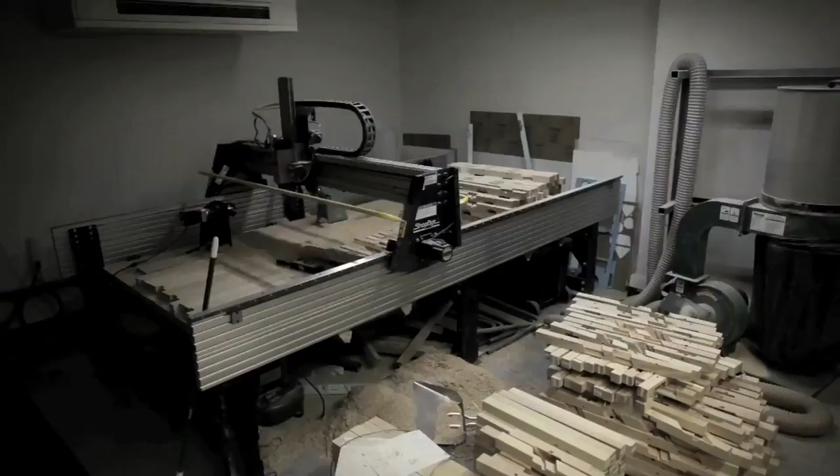Well, MIT is a very different kind of institute. Instead of becoming the recipients of building industry culture, we can now change building industry by the kinds of experiments we're doing in school.

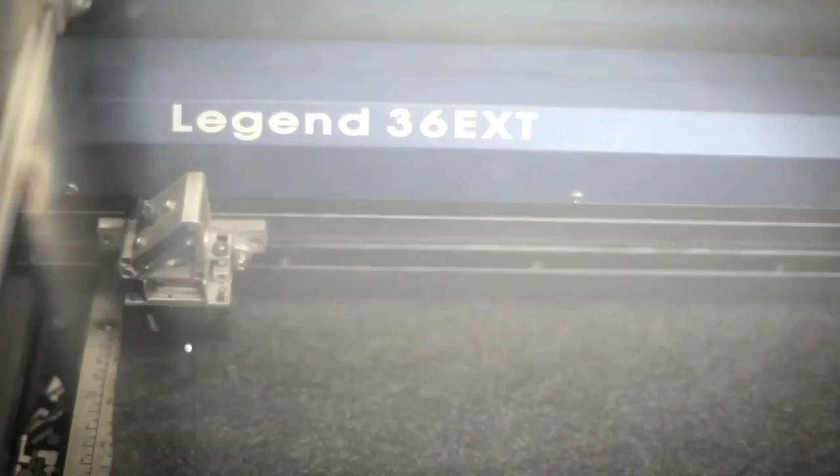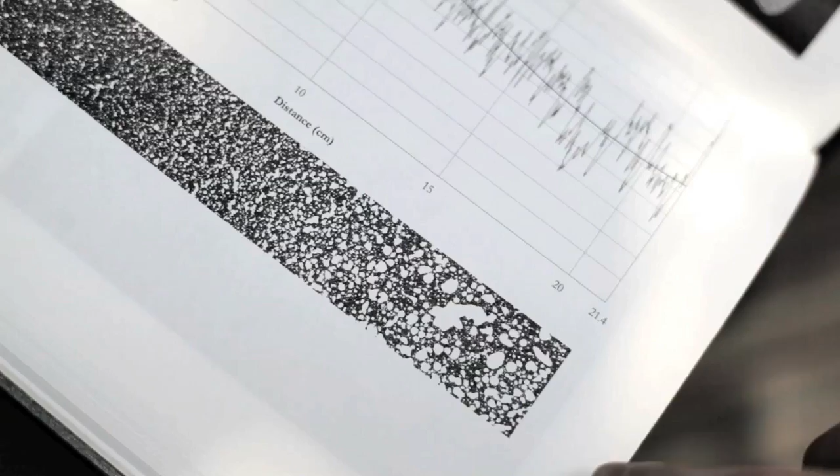MIT has a variety of departments that are so powerful that they have the potential of radicalizing what we do in design and in the architecture department. Even the way that we've structured our curriculum around workshops and other kinds of collaborations in a way fosters and encourages this kind of cross-disciplinary platform. So we're situated perfectly for the kinds of things that only MIT can do.

The invention of human artifacts of any kind always consists of three elements: the geometry, the process, and the material that constitute that artifact.

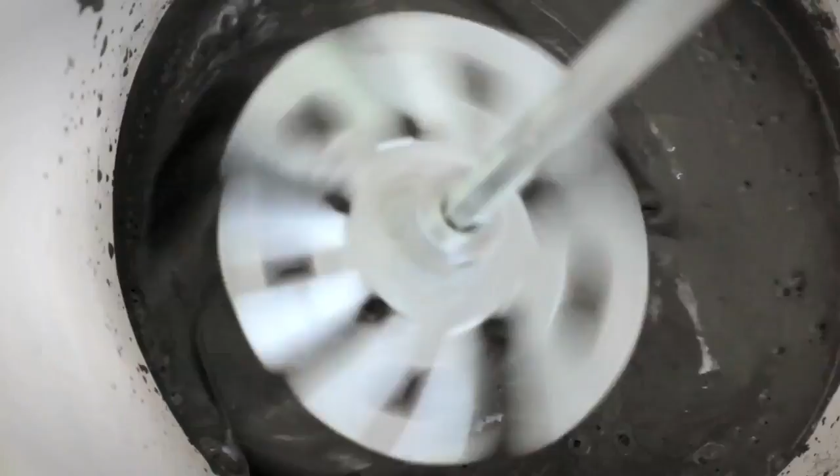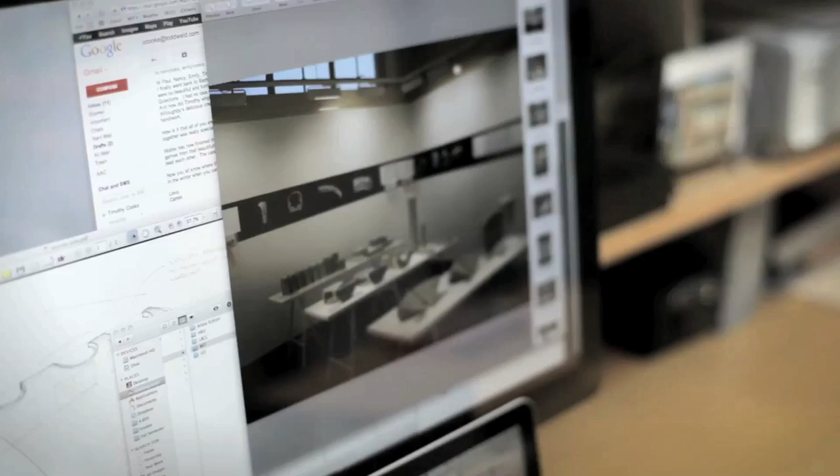It's very clear that new materials engender new forms, and architectural design benefits from addressing and applying new materials in an informed way. The Emergent Materials Group and the Urban Metabolism Group share a central interest in materials for the built environment. Lately, we've been working a great deal in the area of foamed materials, especially foamed cements and concretes.

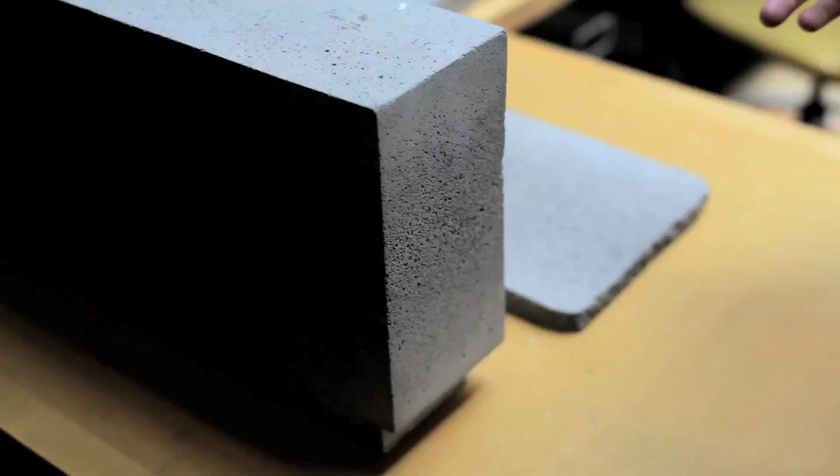Typically, a beam in bending is going to have the greatest amount of stresses on the top and bottom, so we can reduce the amount of material on the interior of a beam.

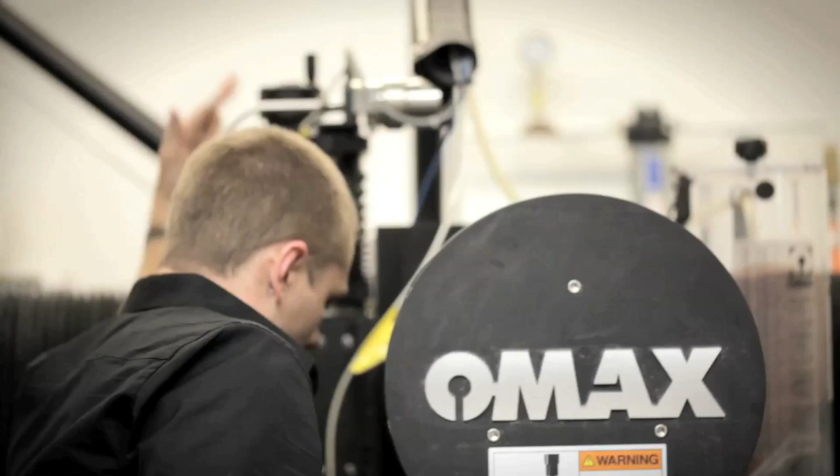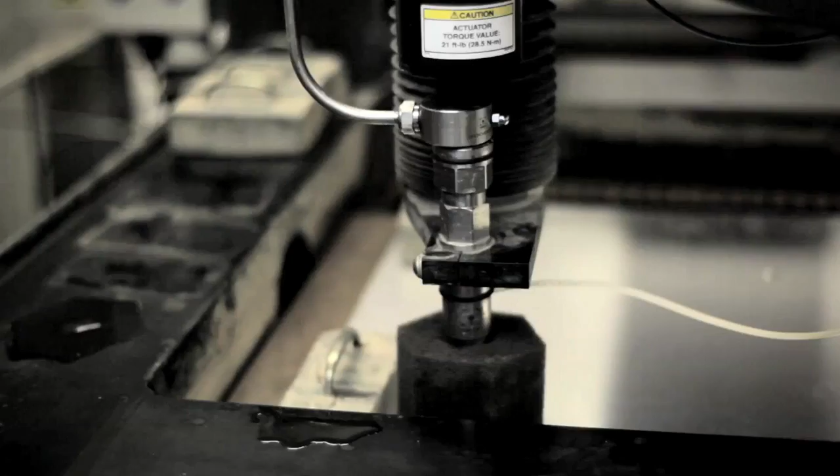The work really tries to address that there's two main paradigms throughout almost every industry. The one paradigm is what can you design, what can you compute or analyze, and the other paradigm is what can you physically construct or what can you build.

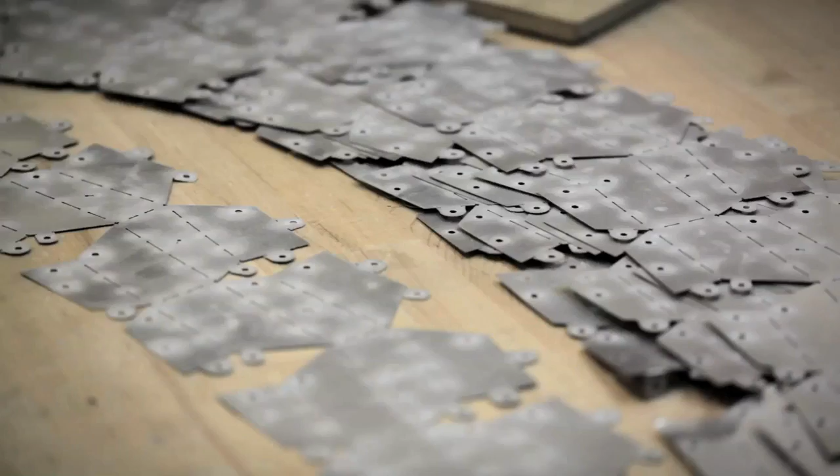The work really tries to traverse all scale lengths. It tries to work from the nanoscale, which is traditionally where we see self-assembly in biological and chemical examples, and it tries to bridge that and say, can't we use this phenomenon of self-assembly as a new paradigm for building things at large scale?

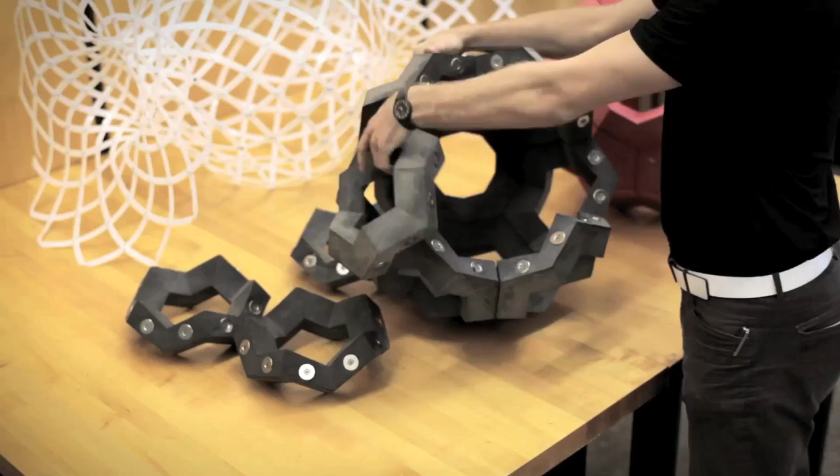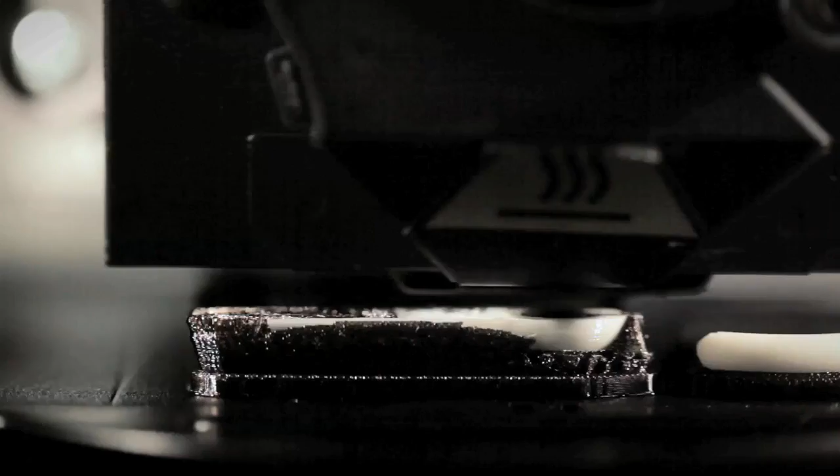We work with any type of material, synthetic or natural, and really try to design specific geometries that have materials in mind. When you design those two together, they can respond to energy. The energy sources can be heat, shaking, gravity, pneumatics, electronics—so you can use any type of energy. When you mix that with the geometry and material properties, then they can respond and change state.

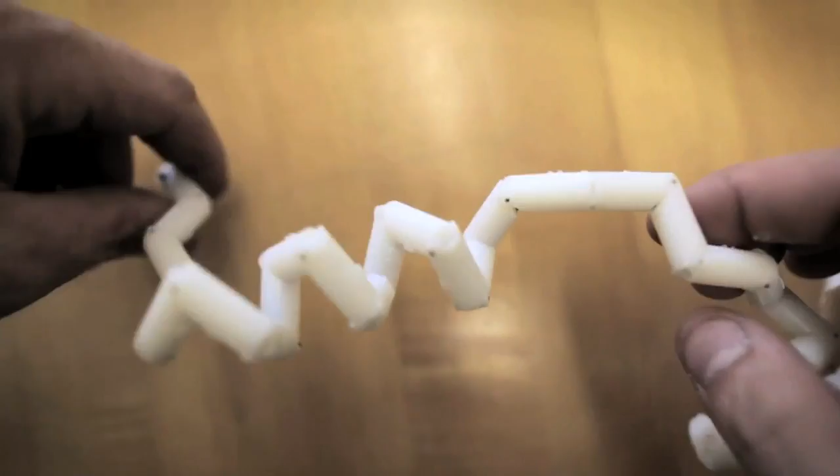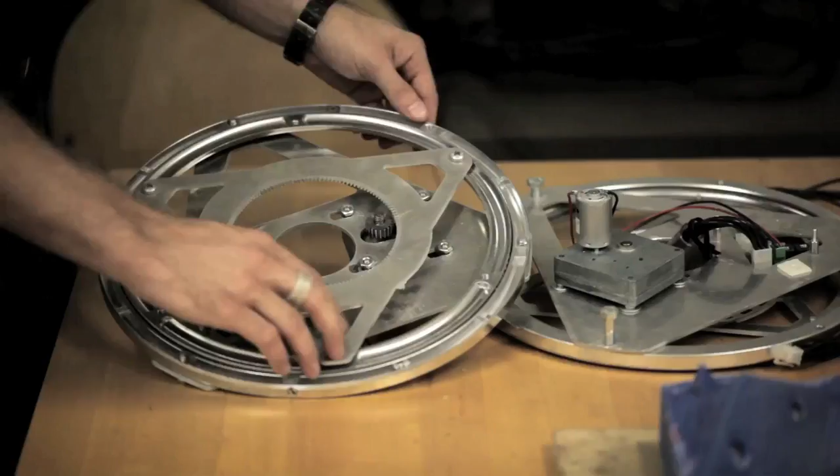Primarily, it will first be applied in extreme environments, scenarios where it's difficult to build. The research and the practice is really about cross-disciplinary collaborations between designers, scientists, and engineers working on this phenomenon of self-assembly, discovering where we find it naturally, where we can use it synthetically, and trying to apply that at all different scale lengths.

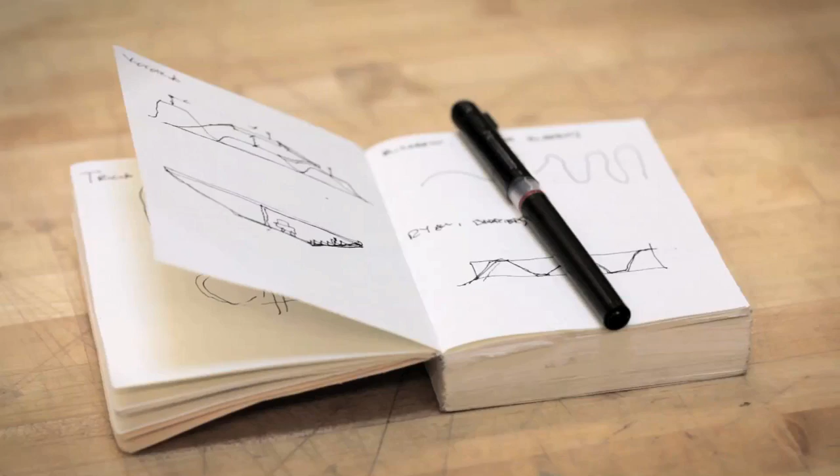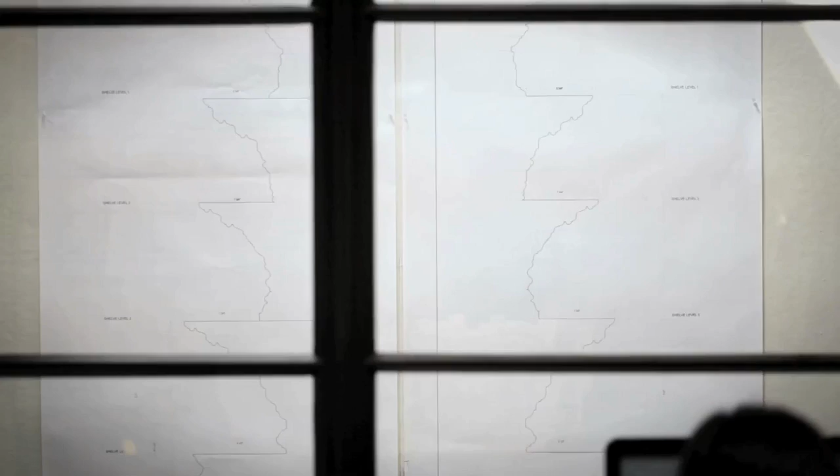The focus of our work, at least at this smaller scale, at the scale of say art installations or retail, we leverage CNC fabrication methods, but not as a way to exude their prowess necessarily, but more as a way to help us get at a particular formal agenda.

An installation called Totems, which in a way is a kind of proto-architecture—not quite architectural, not quite sculptural—I think offers a kind of proposition to each of those disciplines.

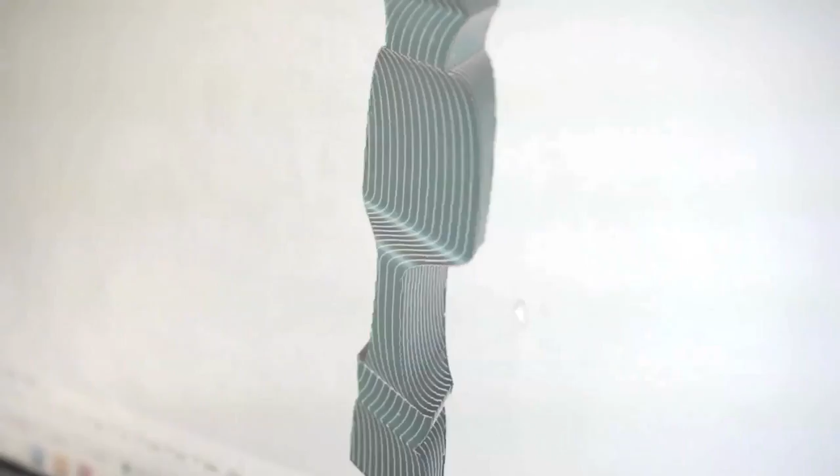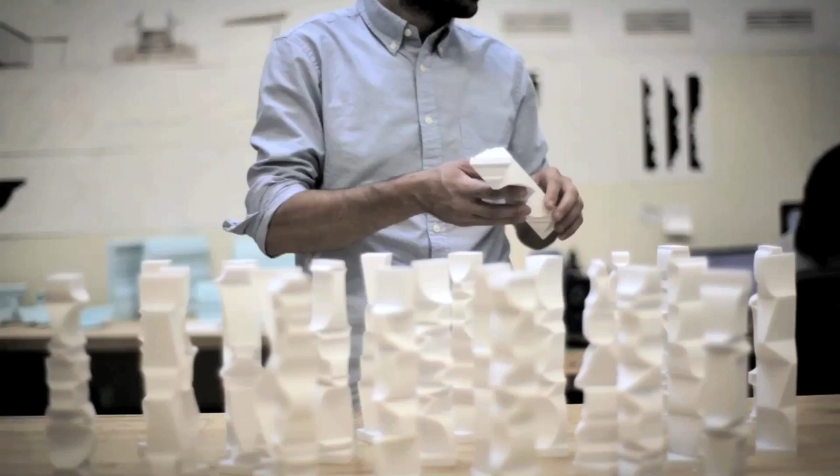We do a lot of testing via 3D prints. A lot of the formal investigations for Totems specifically happened in 3D prints. We did maybe 30 to 50 3D prints of the totems as a way to understand how the light and shadows were working and how best the anamorphic effects were working before we went to the large format wire cutter.

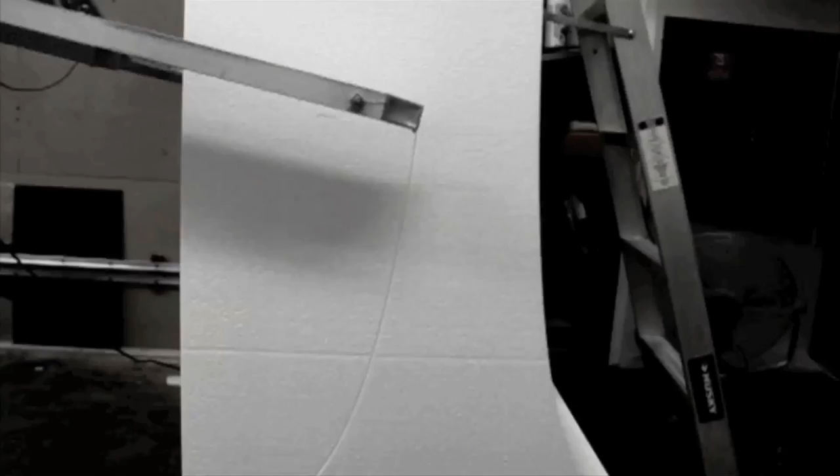In terms of collaborations, some of those happen here at MIT. Joel Lamere and I are developing an installation now, which is an anechoic chamber, and the anechoic chamber uses industrial felt both on its exterior and as a way to absorb sound on the interior.

I'm bringing a kind of disciplinary, formal, or geometric interest on the one hand, and also a certain set of specialized understandings of the behavior of these sheet materials on the other.

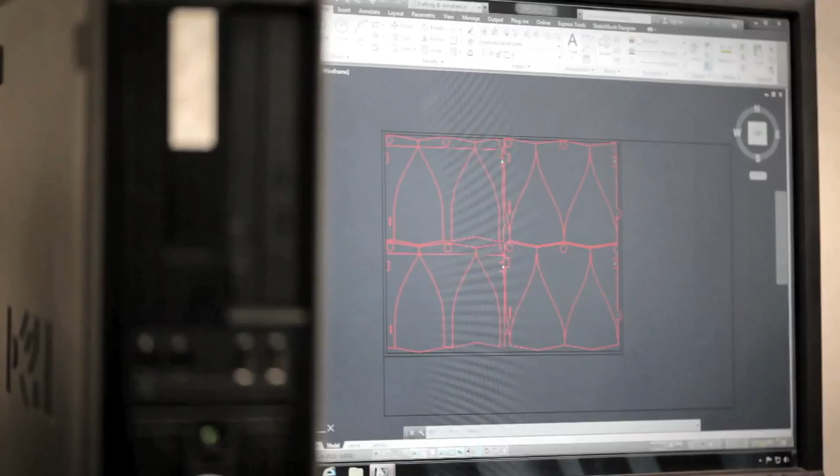So my architectural interests are really broad, but in terms of my current research preoccupation, it's about material geometry—specifically sheet shapes or sheet material geometries, how they bend, stretch, stack, fold.

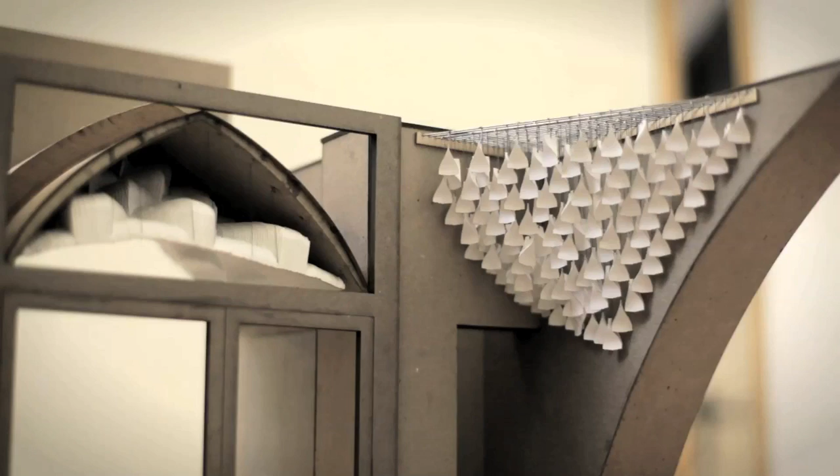But obviously understanding sheet materials is really critical to architecture. It's a long-standing discourse on sheet materials in architecture, in part because it's so ubiquitous in conventional construction. So everything including plywood, sheet metal, steel, aluminum, and plastics all have to deal with developable surface geometries, which is to say sheet shapes generally. And so expanding the total set of understandings about sheet shapes is a totally and kind of obviously worthwhile architectural undertaking.

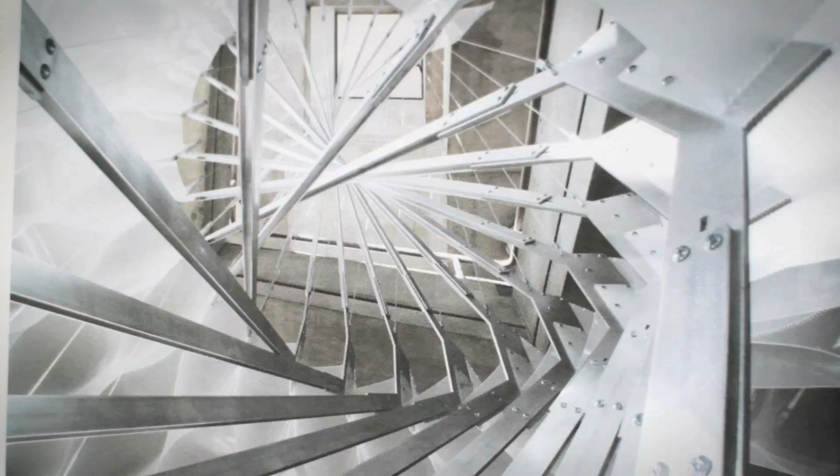These installations attempt to jump from the scale of the paper model to, you know, the scale of the architectural space at the very least.

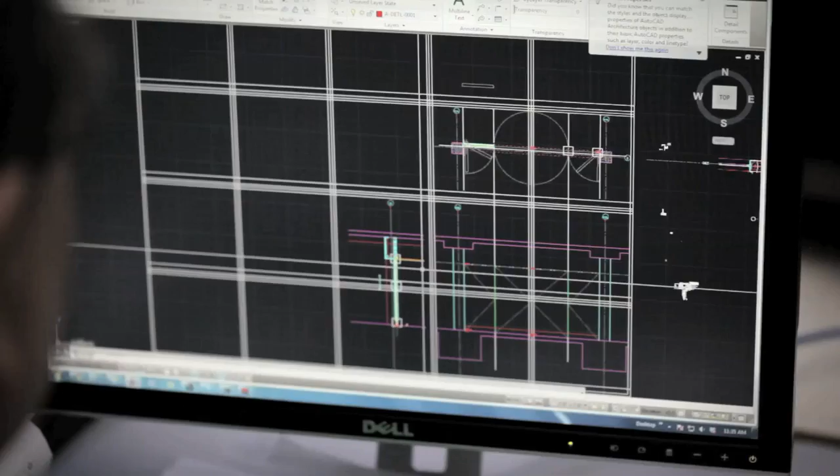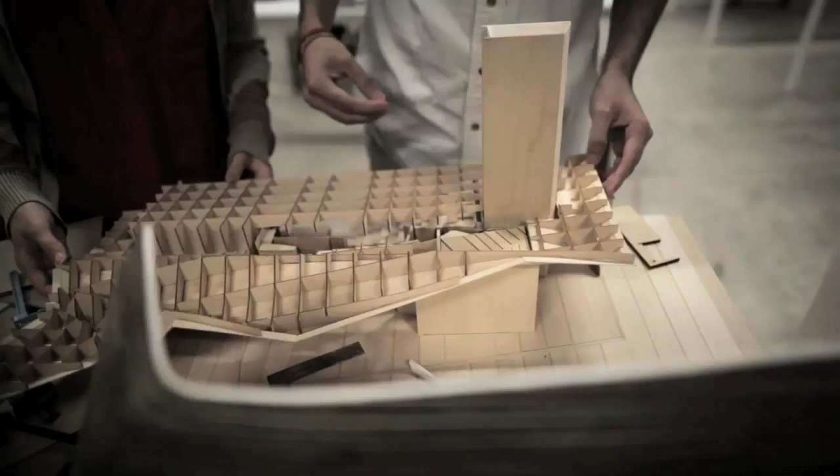Well, over the past 20 years, first as Office dA, now as NADAAA, we've identified two or three areas of focus. The first has been to look at materials and their behavior as a point of departure for many of the architectural experiments we do. The second area is to recognize that materials don't have an endless limit. Everything comes in modules, in sheets, in blocks, in bricks, and without aggregation, there's no way of figuring out how construction works in general.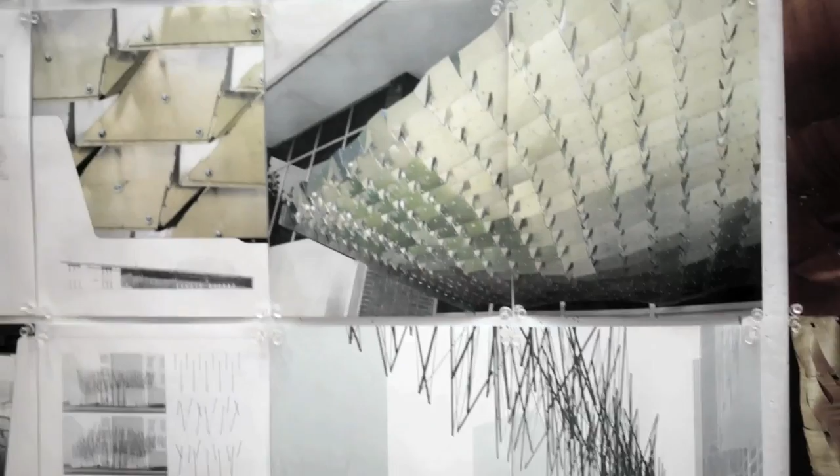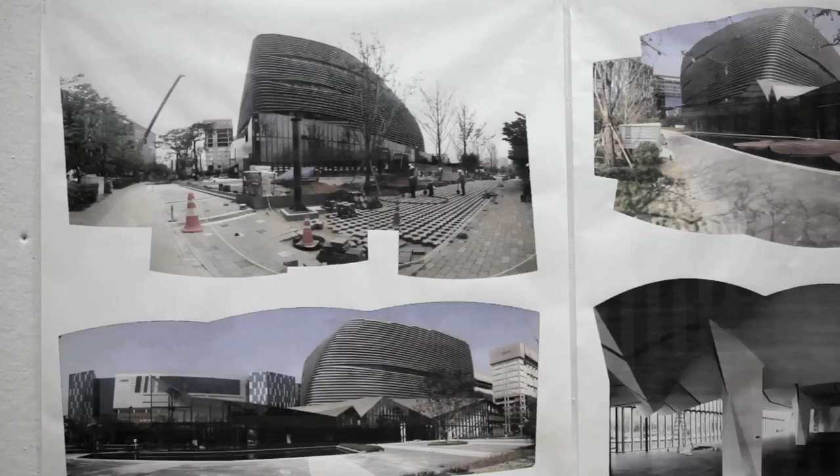So the detail of bringing things together as a point of departure has been another central focus. This has been a point of revolution for a range of projects that we've researched and undertaken, some at the scale of a piece of furniture, others at the scale of a building, and others really at the scale of urbanism.

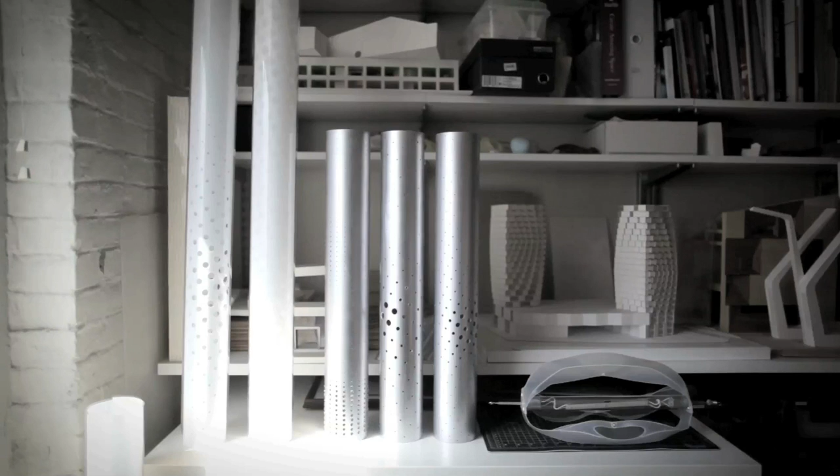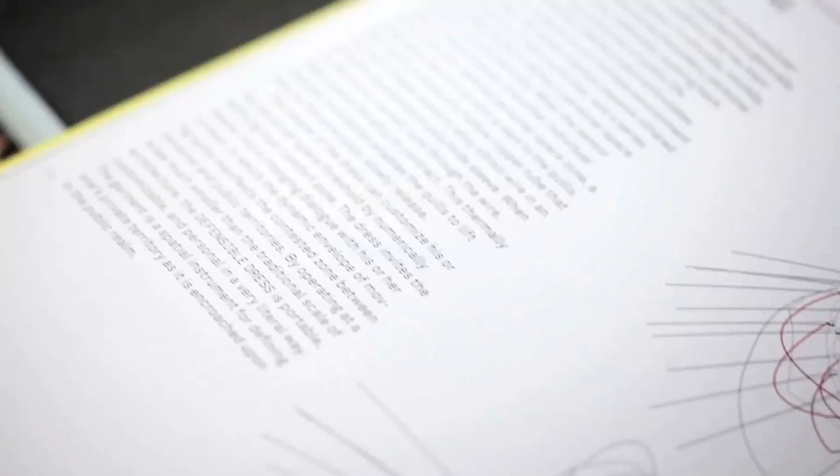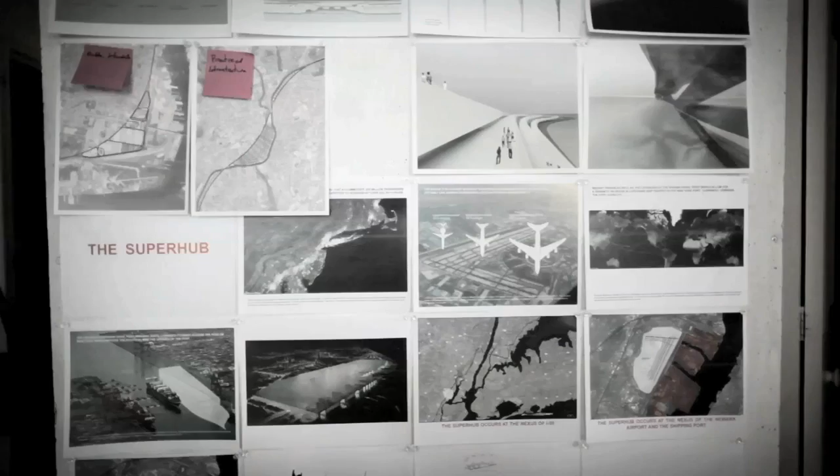One of the agendas of the studio is to create interactive architectures for public space through design and technology. These projects can range in scale from the scale of the body, such as the Defensible Dress Project, a wearable architecture which uses a microcontroller and shape memory alloys to defend your personal space, to very public scale infrastructural projects, such as our proposal for the Audi Urban Futures Initiative, where we're speculating on high-speed regional infrastructure and transformations in the city around issues of mobility for the year 2030.

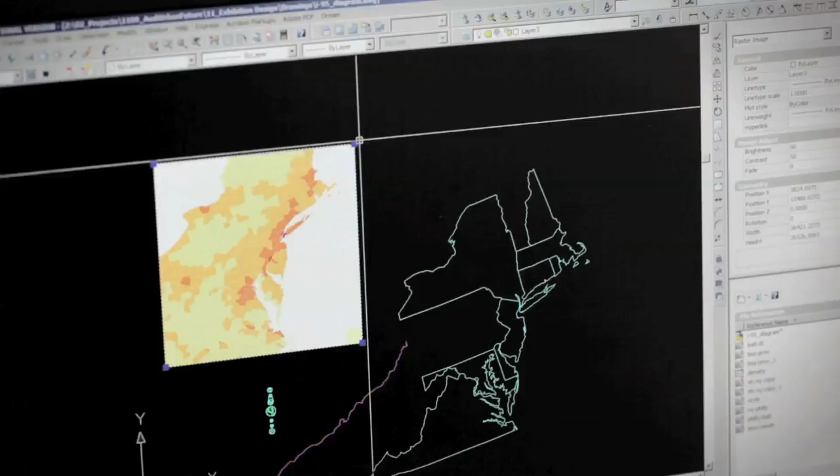It seems now more and more necessary that our environments have to become smarter, more responsive, and more flexible. The way in which architecture is made needs to be completely rethought if we're to go beyond bricks and mortar to engage the challenges of the next century.

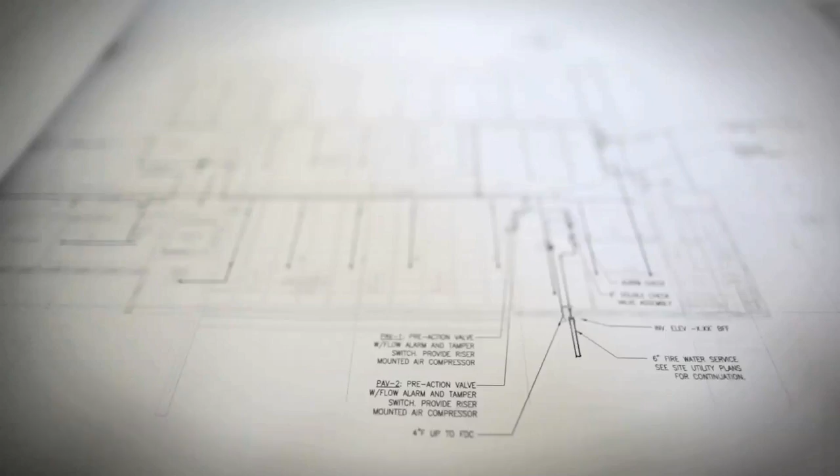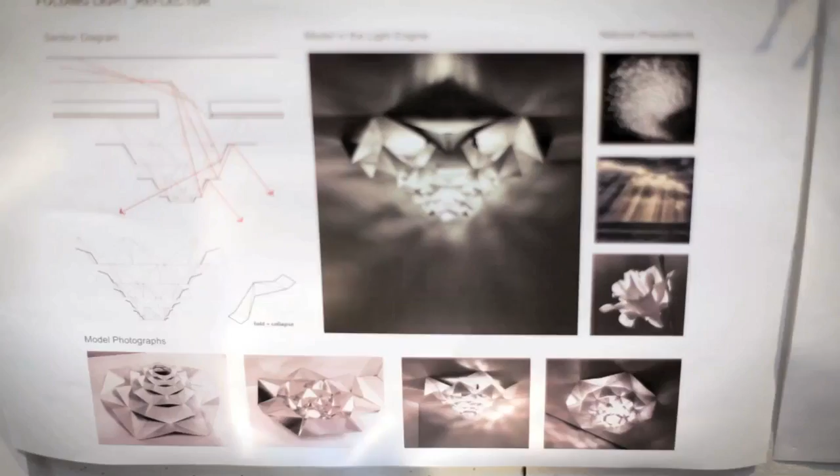My work as an architect focuses on designing architecture and urban scale interventions that engage the emergent infrastructure of our time. We're interested in how design engages that mutability between energy and matter, when materials generate energy or store it, when materials are dynamic and change state, exchange heat, produce light, or communicate information. The challenge, I think, for the discipline of architecture today...

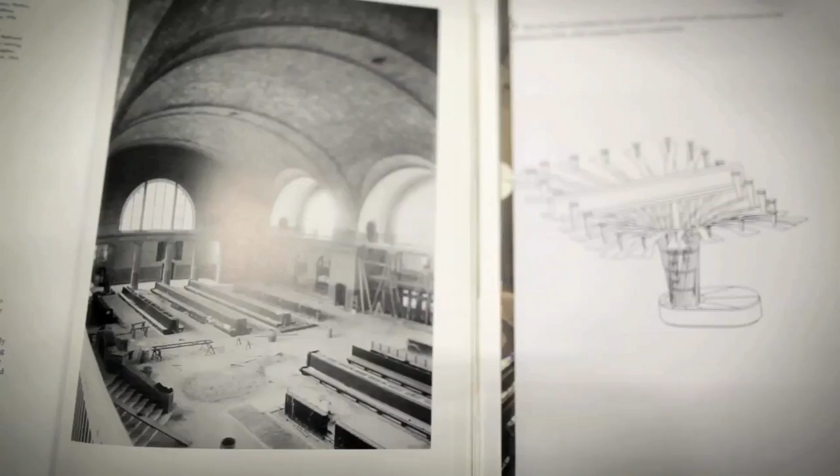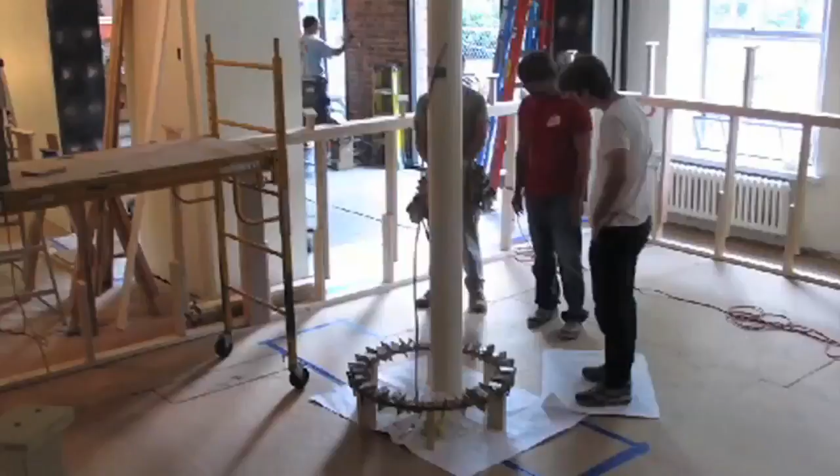isn't in digital fabrication, it's in material fabrication, in thinking about what it means to be material today when we move fluidly between digital and physical realms, how we use materials and not waste them, and how we form materials and how we transport them.

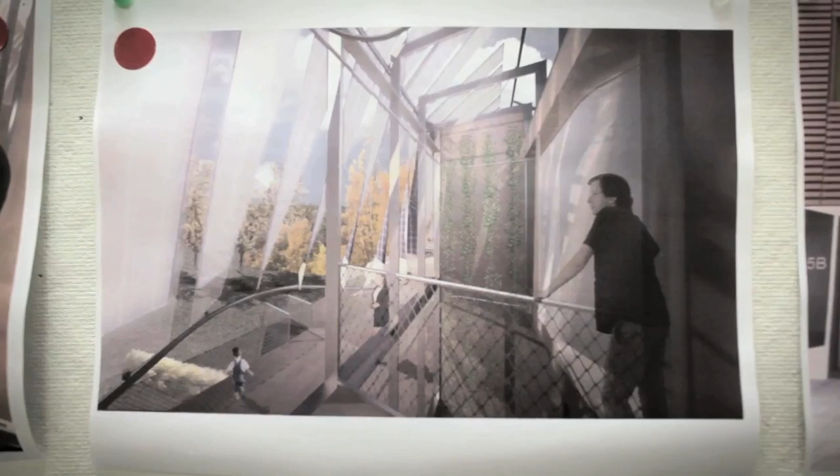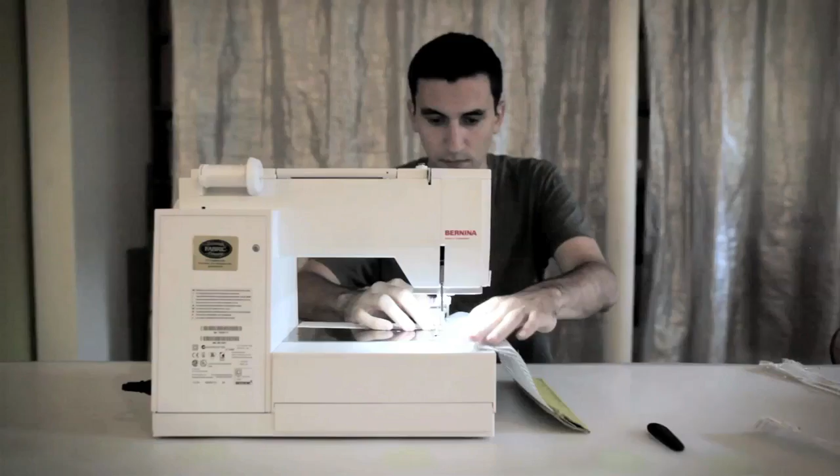If we're going to change the building industry and regenerate an innovation-based manufacturing segment in the United States, then I think we need to do this from within practice, from working with the norms of the building industry, but not settling for those norms, instead innovating to both accept and transform those standard conditions.

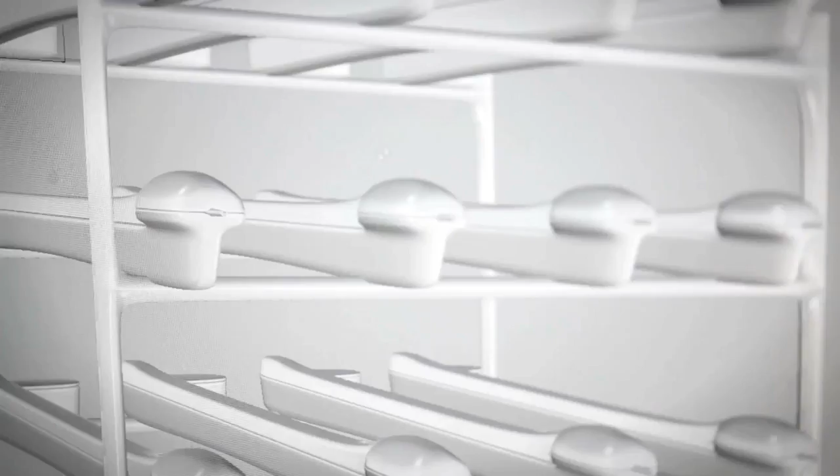I think we're pursuing several initiatives relating to computational material at several different areas. Dynamic interactivity is one with HypoSurface, and we're driving that forward, imagining actively alloplastic environments, if you like. It's a demonstration of the power of computation in real time.

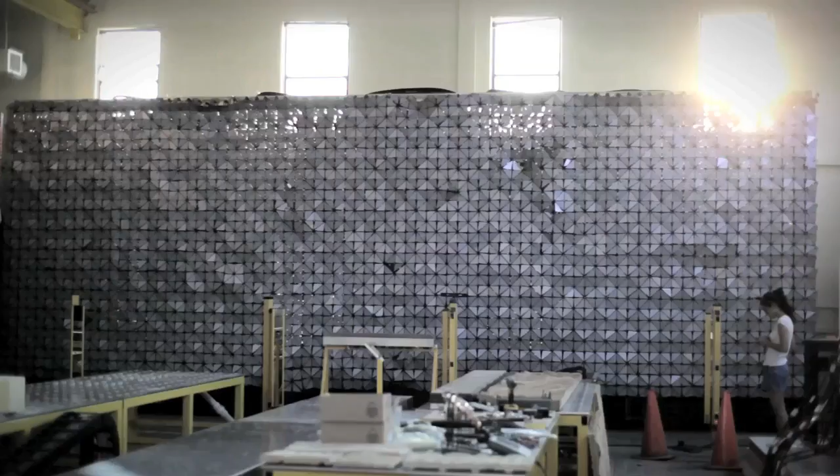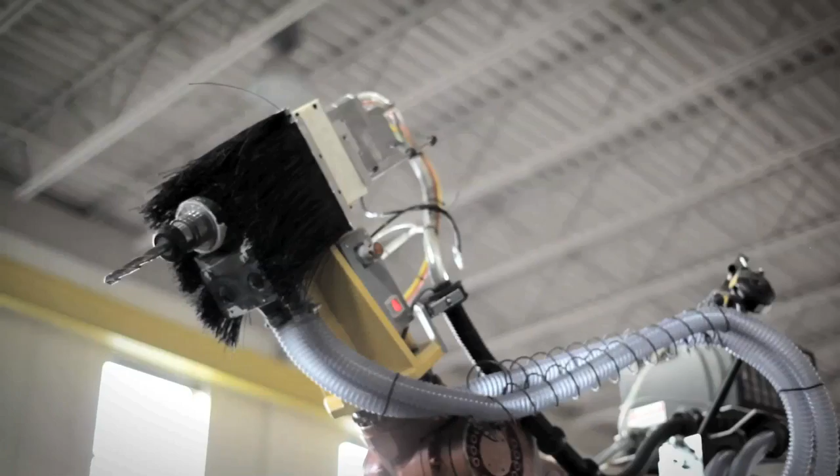Then in the robotic manufacturing work, we're looking for power, information and material all coming together, but with control directly at the architect's workplace. So we're developing tools that allow architects within their native software like Rhino to pilot a powerful production machine like a KUKA robot, demonstrating what will be the future of manufacturing, which is sophisticated algorithms and modeling that link directly to sophisticated manufacturing machines and allow new efficiencies but new versatilities, new formal complexities.

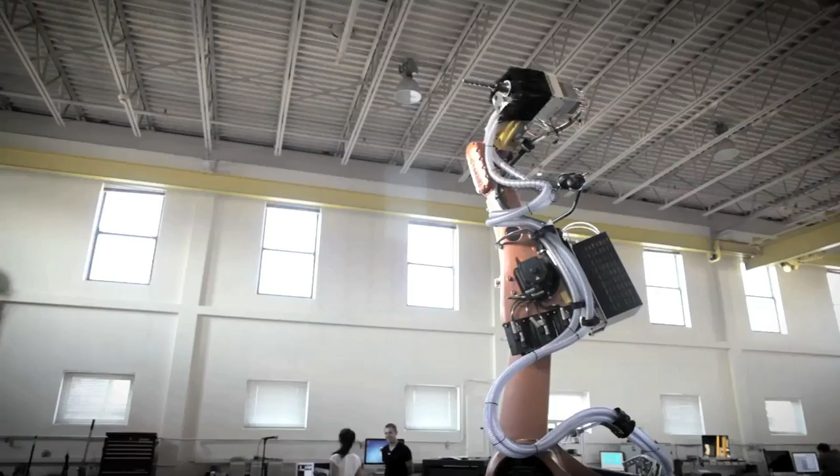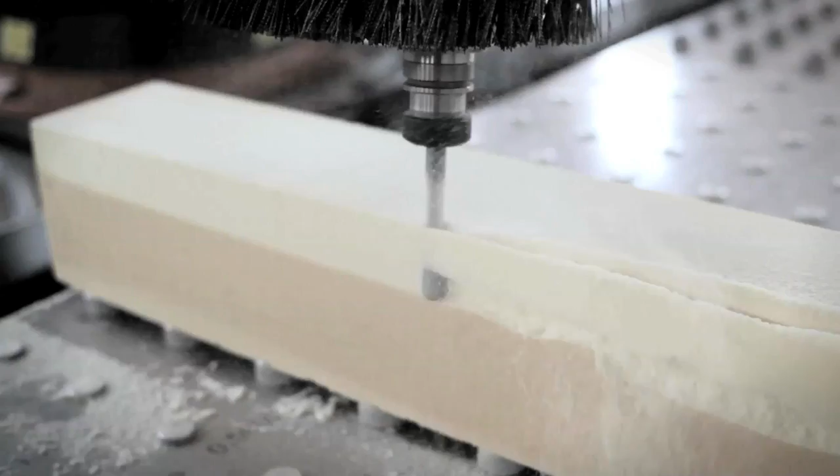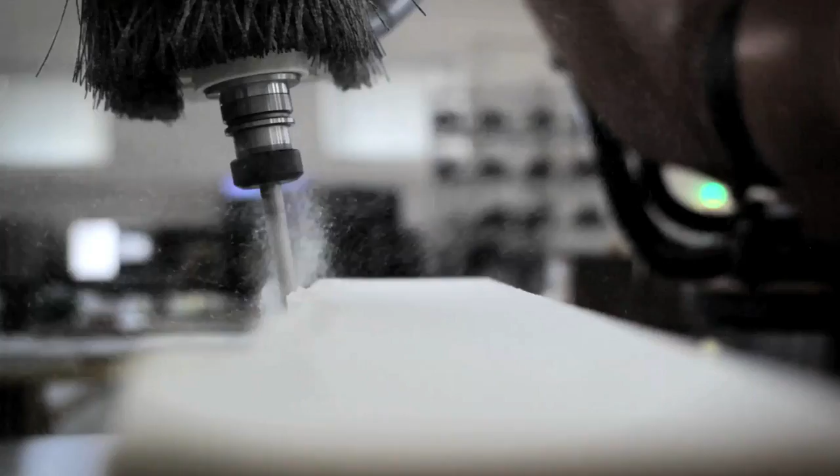I'm also frustrated by the slowness of the building industry to innovate materially. There's a fantastic amount of research in material science that's pent up and is just dying to come at a period where environmental concerns are becoming so enormous, and the challenge of building the developing world is so extraordinary that they're necessary.

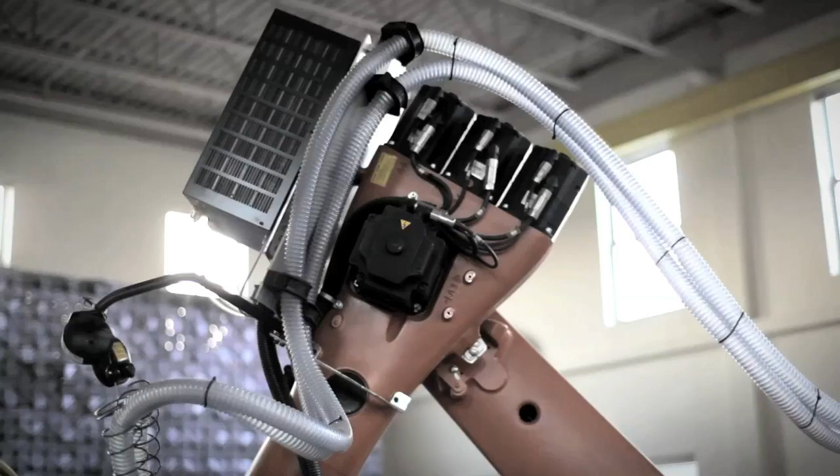CAD/CAM meets material science like composites, I think, is going to breathe a whole new life into the architectural and building industries.